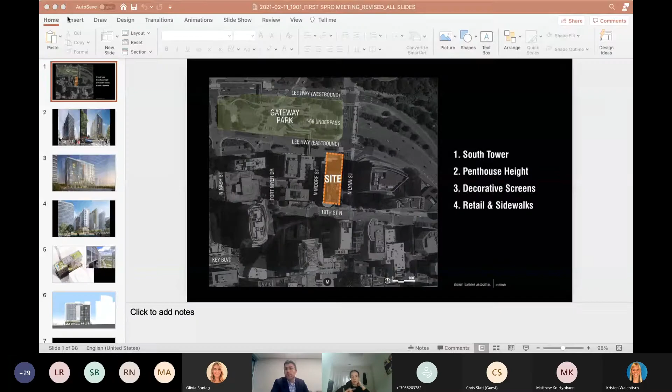I'm Shalom Baranes, working with a team on the project from my firm, Shalom Baranes Associates. I want to make a very brief presentation touching on the 4 topics you see here. Some of these have been refined somewhat since we published the 2 videos, and others I just want to add a little information to. If we could go to the next one, Jeff, please.

Thank you. On the left, you see an image of the south wing of our building that was in the 2 videos we published. We made some changes to the elevations, primarily having to do with relocations and reconfiguration of the balconies on the facade, on all 4 facades of the building. You see the revisions in the rendering on the right.

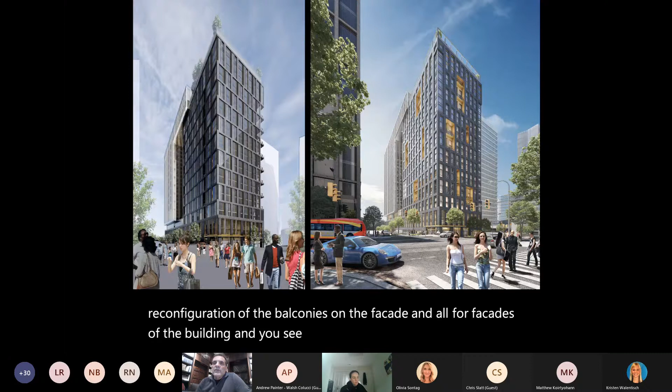Rather than stacking the balconies vertically on the corner, as you see on the left, on the right you can see we've developed them more in a collage-like fashion. One of the reasons we did this is we wanted to develop a bit more contrast between the north wing and the south wing of the building, and we felt this was one way to accomplish that.

Here's just one more view of that as you look at it from the Key Bridge side, looking south.

The next issue I wanted to address is the penthouse of the building. In the left-hand diagram, you see again the south wing, the left darker portion of the building, where the swimming pool is - no changes there. That has remained the same.

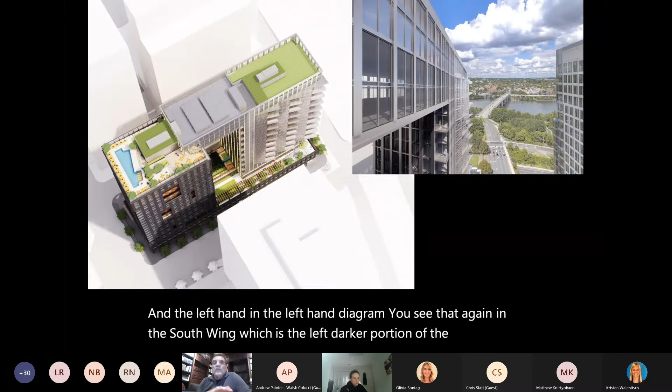But on the rest of the roof, which extends approximately 2/3 of the length of the site, we reconfigured all of our equipment, moved some of it around, and created some wells that go down into the lower space. All of that enabled us to lower the overall penthouse by 10 feet across its entire length.

So here in this image, everything you see in white at the top of the building, including the bridge that spans over the sky window, is now 10 feet lower than it was in the videos we published previously.

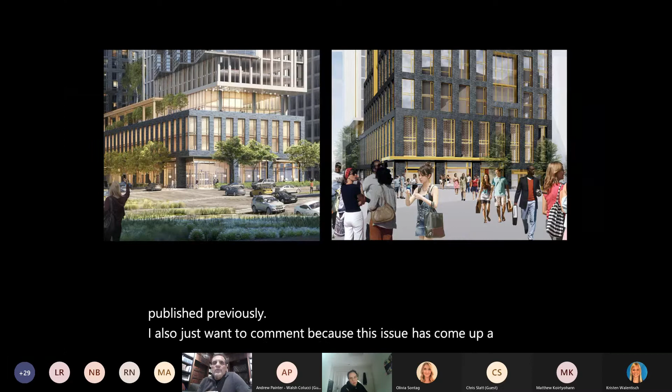I also want to make a comment because this issue has come up a lot about the 2 stories of parking we have above the retail. As you can see, we are bringing the primary facade materials all the way down here, so we're not trying to save money by going to a less expensive facade material.

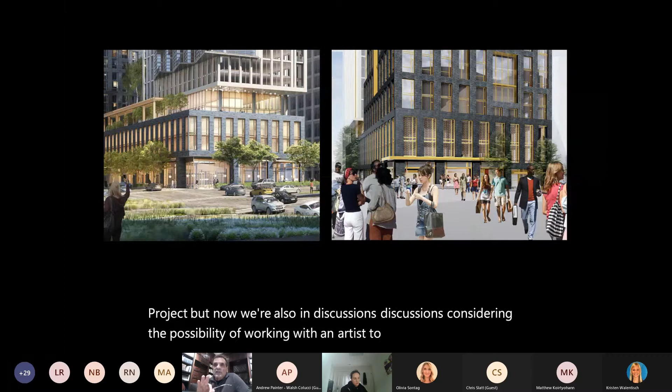In all our renderings, we've been showing these decorative metal screens, which we do intend to incorporate into the project. But now we're also in discussions considering the possibility of working with an artist to infill some of these panels, between the vertical piers, with graphics developed by an artist in collaboration with us. We're particularly focused on the elevation you see on the left, which is the elevation of the building you see as you come across Key Bridge.

The next topic I wanted to address has to do with the public realm at the ground level around the site. These existing photographs, I just wanted to show these to remind you all how narrow the streets on the east side and west side, North Lynn and North Moore Street, of our project are.

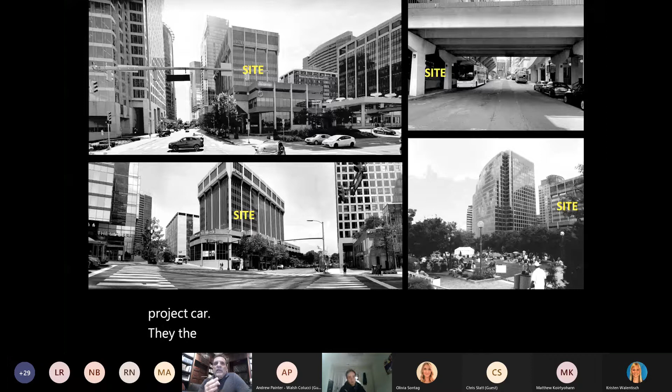The current width of the plinth of the existing building cantilevers over the sidewalk, and that existing plinth is 112 feet wide. We are going to narrow that portion of the building in our new project down to 89 feet. So it's going to go from 112 down to 89, and that will considerably improve the sunlight and daylight coming down on both North Lynn Street and North Moore Street. They'll just feel much more generous and I think be more pleasant streets to be on.

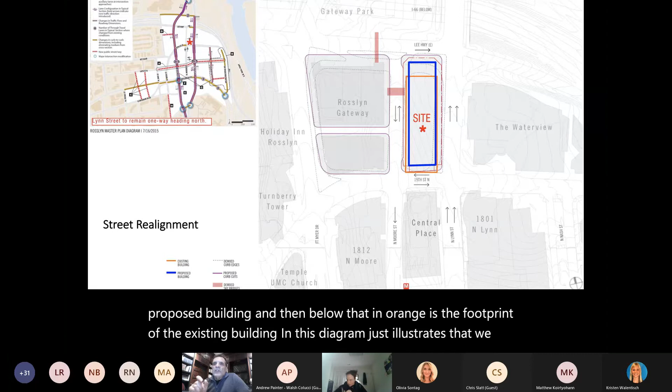So here in blue on the right, we are showing the footprint of our proposed building. Below that in orange is the footprint of the existing building. This diagram illustrates that we are making our new building narrower, leaving more room for planting, sidewalks, and amenities.

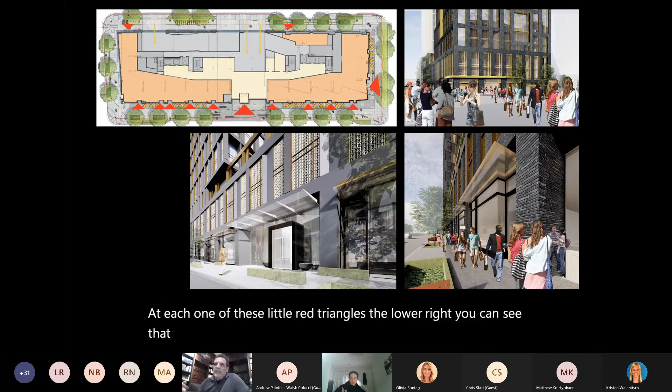The other thing we did, if you look at the rendering on the lower right, at each of these red triangles, you can see that we recessed the glass slightly. That becomes a potential location for a retail door, and it also creates a 90-degree glass corner for retailers to display their goods. All of this is being done to enliven the retail in the public realm as much as possible.

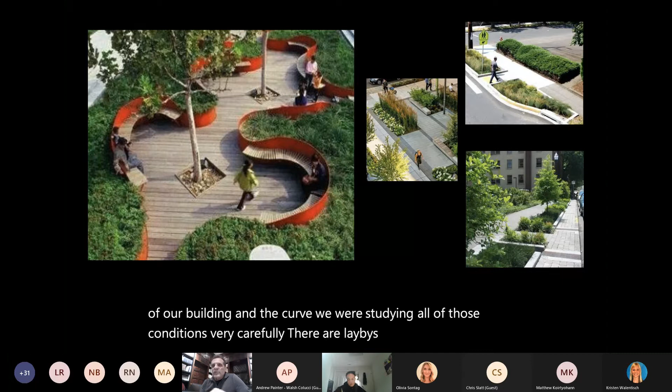Beyond the face of our building, between the face of the building and the curb, we're studying all of those conditions very carefully. There are laybys, driveways, straight curbs, and we are developing unique, specific landscape conditions, such as you see here in these precedents, to address all of those different conditions.

The larger image on the left, with the red ribbon bench, is an idea we're developing for the north side of our building, which is directly across from Gateway Park.

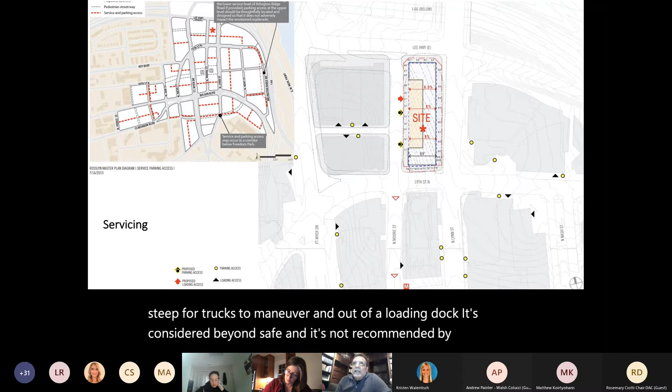So we had to consider a different scheme, which is what we're presenting here, showing service entrances along North Moore Street instead of a service alley cutting through the middle of the block. We had this exact same problem on the Monday Properties project on Wilson, which hasn't been built yet. There, the sector plan also called for an east-west service alley, and as we studied it, we found there was really no way for trucks to maneuver. We developed a similar scheme that did not cut through the center of the block. Thank you, I appreciate that there was a focus on loading access cutting through the block.

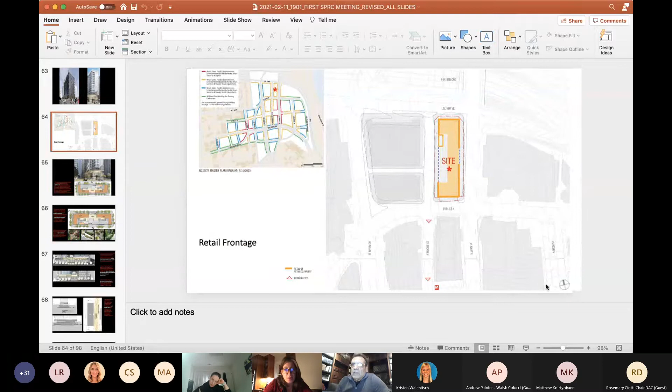I'm concerned because the block looks enormous, and if there was a way for neighborhood residents to cut through the block, not necessarily loading vehicles. How might a neighbor cut through, or do they have to go all the way around?

I'm sorry, are you referring to the ramps of the parking garage? Yes, the above ground parking. For the parking garage, for the parking. Okay, thank you.

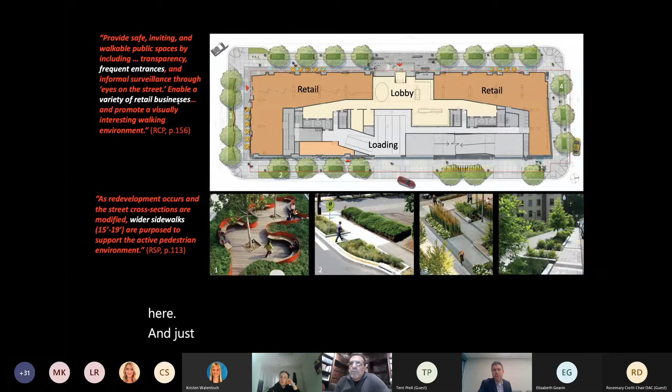Building onto that too, looking at this, because we have the two components of the building, the two wings shared by the same common lobby entrance, it would be kind of difficult to punch through that and still have a secure lobby for residents. That's a good point, Andrew. You can see the elevators - Jeff, if you could point to the two sets of elevators - there's one there, another on the right, and they're serviced by one lobby entrance, basically.

So I'm wondering if there's a creative option for getting some of that flow. I understand it might not go directly through the middle of the building, which might then become less desirable or useful for community and neighborhood residents. But is there a way for some sort of a path through part of the retail? I'm sympathetic to the fact that this makes the block a little impassable for residents in the community.

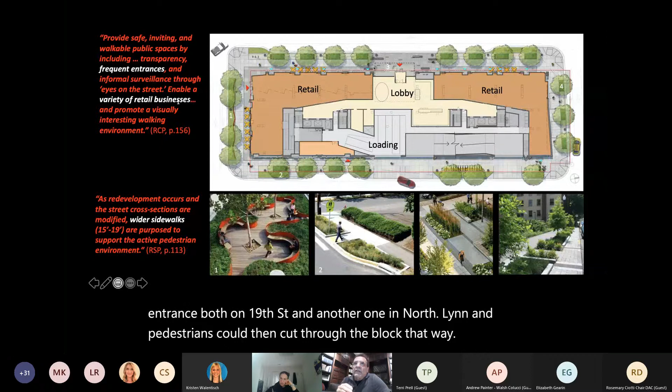Yeah, Jeff, can we go back to the ground floor plan, please? The image you just had up a minute ago. Here we go. Certainly, if the retail level were occupied either on the north end or the south end by a single retailer, it would then be possible - contrary to what some original speakers wanted, having one entrance to the retail - but if you wanted a cut through, it would be possible for a retailer to have an entrance both on 19th Street and another on North Lynn, and pedestrians could cut through the block that way, either at the north end or the south end of the building.

As I was asking the question, I realized that would go counter to some of the prior commentary regarding equal access - one entrance, exit, as we were talking about. Although from an accessibility standpoint, if there was that flow, is there a concern if you had kind of an entrance and exit? Again, understanding it would have to be one retailer with a large footprint in the space.

Both entrances on the east and west in that situation could be designed to be fully accessible. This is a very challenging block, given how narrow it is and how we have to fit trucks, loading ramps, and garage ramps into this particular dimension that we have.

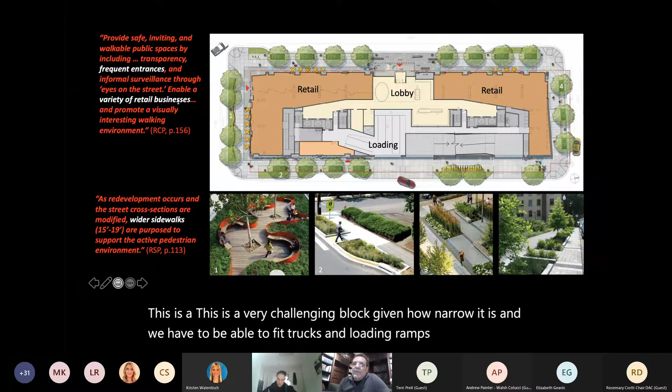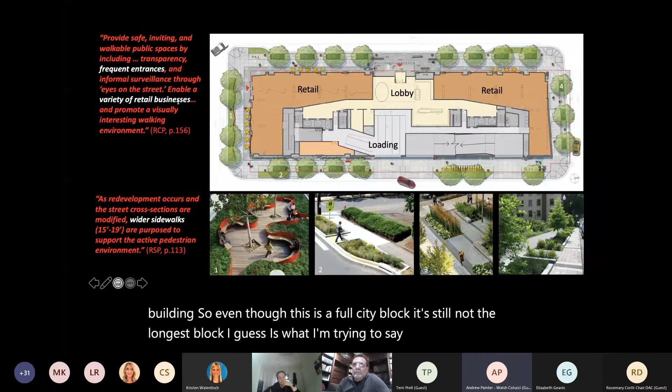I mean, you talked about the narrowness of the site. It's probably the most narrow block in all of Rosslyn, but the length of the block, when we think about a huge city block, is pretty comparable to Central Place immediately to the south, as far as the length of that entire building. So even though this is a full city block, it's still not the longest block. It's comparable to other buildings you'd find in Rosslyn, and on those blocks, like in the 18th Street corridor, there is that passageway through as well.

Commissioner Gearin, your hand is raised. Is that from before or a new comment? It is a new comment.

So this kind of gets at the next part of the agenda, but when I first asked about cutting through of the super block to make it easier for the neighbors to get through as the whole community gets built up, you'd said that it had to do with the way the above ground parking is oriented. Are we sure we need all of that above ground parking? The ratio is much higher than what's required for the site.

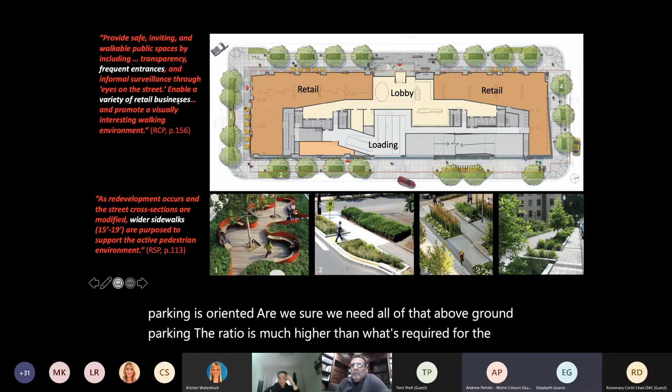Sean, do you want me to start off with the parking ratio issue? Sure, go ahead. So by way of background, I think we've got 290 spaces, and we've tried to size the garage to accommodate the anticipated market demand here.

I think the goal from Jefferson Apartment Group's perspective is to really right size that garage so that it is on one hand adequate to meet the market demand, but on the other hand, not provide extra parking that incentivizes people to drive. When we were laying things out, Matt, I don't want to put words in your mouth, so feel free to chime in.

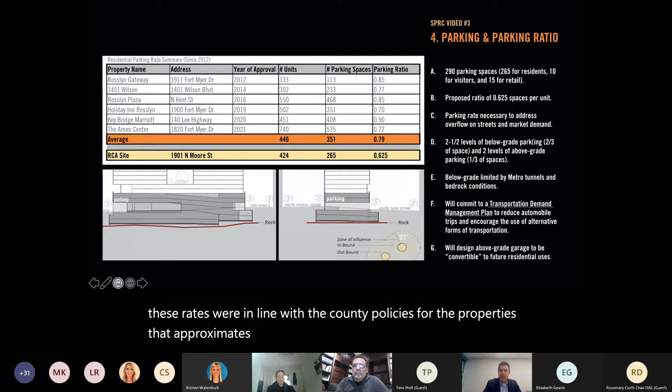But my understanding was that these rates were in line with the county policies for properties proximate to Metro Rail, and certainly in line with, if not less than, the other projects that have been approved even recently within proximity to the site. I think a lot of the other projects are at 0.70 to 0.90 spaces per unit, and we're down at a 0.625 ratio.

So I just, from a ratio perspective, wanted to mention that. And we can get into the reasons why we have the above grade parking or why we can't go deeper, if you like. But I wanted to mention that as far as the ratio goes, on one hand we're trying to thread a needle of meeting market demand, and on the other hand recognizing that we are proximate to Metro.

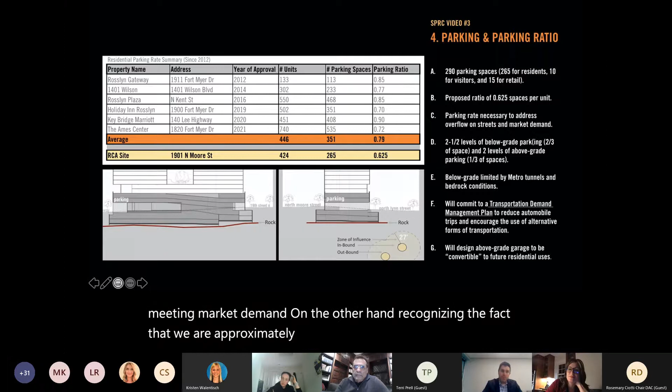Some of the other comments we received were interesting across the different community groups we met with. We met with North Rosslyn Civic Association and North Highland Civic Association, and there were differing opinions about how much parking should be provided here, concerns about overflow parking on adjacent streets and things like that. Then another group was interested in reducing parking wherever possible. So we've tried to strike the balance. Relative to the other projects that have been approved recently, I think ours is among the lowest, if not the lowest.

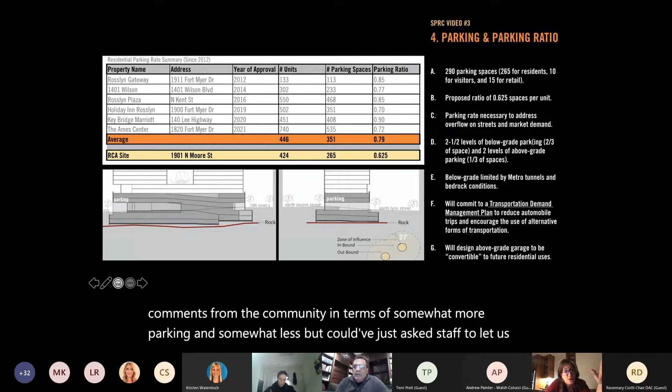Thanks, Mr. Painter, that is helpful, and we have run into that before with developments in Rosslyn. We get mixed comments from the community in terms of somewhat more parking and somewhat less. But could I just ask staff to let us know? Sarah, since we've started to talk about the parking, I thought the ratio seemed high, but perhaps I could get a definitive interpretation from staff on that. Let's hold off on that for one second.

I did want to move off of site design and into architecture. If no other comments from committee members on that topic, I will take chair's prerogative and say, with regards to the architecture of the building, I personally really like it. I'm excited with where this is going, and I think it adds something to the aesthetic of the space. So I wanted to give that as a positive comment, that I've enjoyed seeing the evolution of that building, and I'm excited for that aspect.

If no other comments on site design and architecture, I think we are smoothly moving into transportation, and why don't we pick up with parking ratio, which is where we had been a moment ago. Staff, do you want to respond to Commissioner Gearin? Well, I was just going to add on to the previous comments there on the parking ratio.

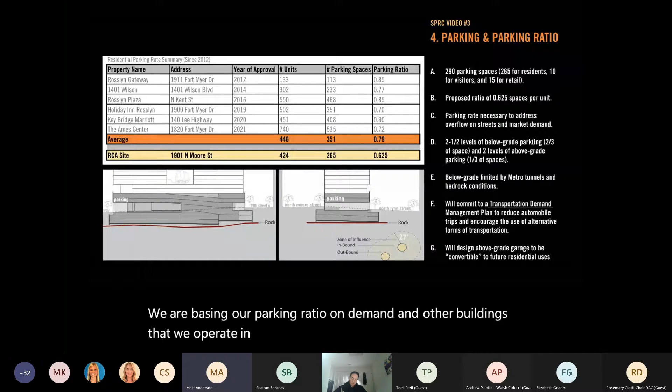We're basing our parking ratio on demand and other buildings we operate in Arlington, so the ratio we're designing for this building right now is what we feel comfortable with to meet market demand. It's worth noting that for the above grade parking, our floor plates are flat, other than the speed ramps leading up to them, so there is potential to convert those to another use in the future if parking demand decreases as transportation trends continue. We are designing to demand, and that may not necessarily be the same as parking ratio guidance.

Staff, did you want to respond on the parking ratio, and then we have a couple other hands raised from committee members.

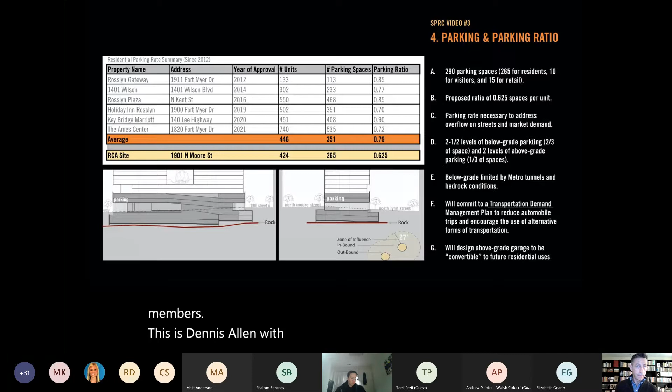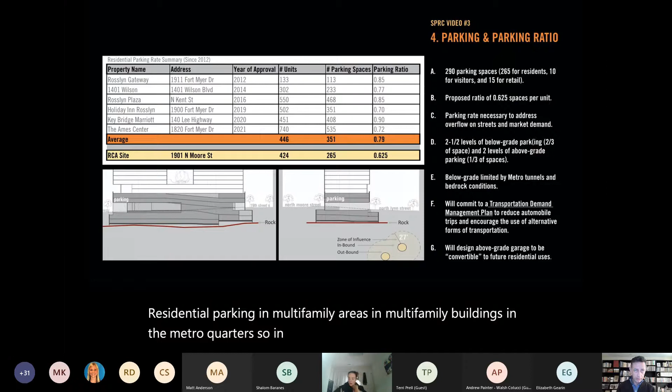This is Dennis Sellen with DES. My comment on the parking is that, as many of you are aware, in 2017 the county board issued guidance that relaxes the ability of developers to provide residential parking in multifamily areas and buildings in the metro corridors. So in this area of Rosslyn, a developer could provide somewhere around 0.2 or 0.3 spaces per unit. This developer is providing approximately 0.625, which is somewhat conservative. I think they showed a matrix illustrating they are around the middle of the road for developments in Rosslyn. So essentially, they are within the requirements and within the guidelines. They could go lower and they could go higher.

We would certainly accept a lower ratio, and we have been accepting lower ratios. I think the lowest I have seen, in a current site plan up in Courthouse, is 0.38.

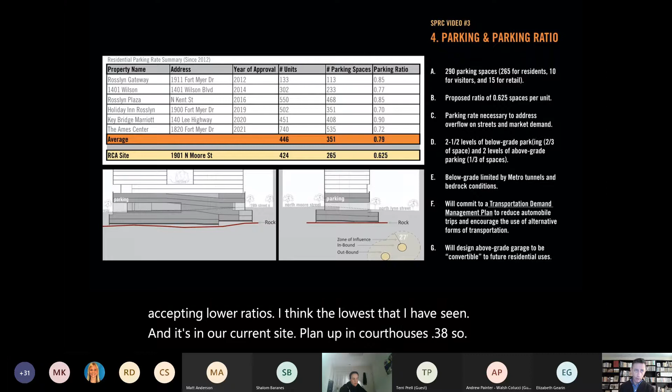It's definitely a question of what market they're trying to appeal to, given the proximity to Metro, the high amount of goods and services, the walkability of the neighborhood, the walkability to Georgetown, et cetera. Are you trying to appeal to a walkable neighborhood, or to folks that do have a vehicle? It's entirely up to the developer, however they are within the guidance as it currently exists.

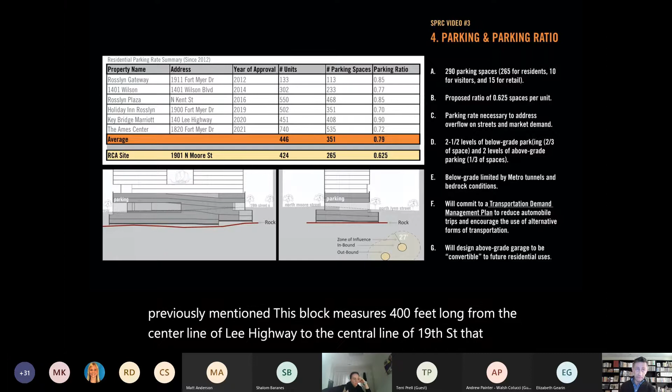I also want to point out one thing on something previously mentioned. This block measures 400 feet long from the center line of Lee Highway to the center line of 19th Street. That is not an excessive length for urban streets, particularly for Rosslyn.

I appreciate that comparison point, though that may not change the community's feelings on what feels like a longer stretch of block when you've got large buildings covering a greater area. So I appreciate that 400 feet is not some sort of super block, but it may not feel that way at the ground level walking. Sorry, I just wanted to make that point.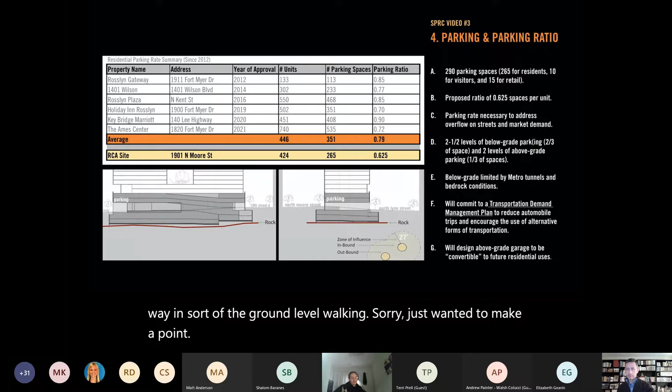I just wanted to clarify with regards to the parking ratios you mentioned. I understand this is in the middle of what we're seeing in Rosslyn ratio-wise, but that does include developments built a much longer time ago, right? It does, and it also includes some approved within the past year, so they have developments of varying timeframes. Okay.

So we do have some other hands raised from committee members. Commissioner Siegel.

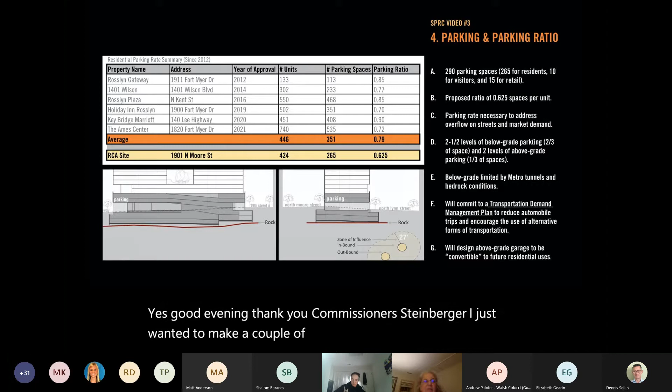Yes, good evening, thank you Commissioner Steinberger. I just wanted to make a couple of comments. I'm happy about your chart. We had seen charts and averages that included parking in Crystal City, which I never thought was an appropriate comparable. I'm happy to see you're at 0.625, because the last building we approved in Rosslyn was, as you point out, Ames Center at 0.72. I'm also happy to see that the above grade parking was designed so it could be reused in some way for another use.

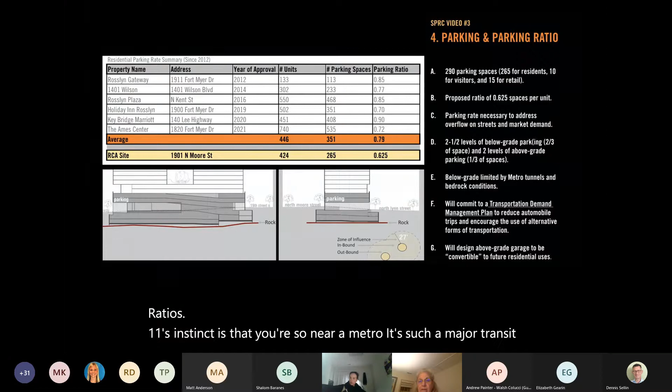It's very interesting to look at this collection of ratios. One's instinct is that you're so near a Metro, such a major transit point, that why would we need that much parking, with respect to the residential parking study which I think Mr. Sellin was referring to in terms of the range of what's possible. But to me, it looks like some progress.

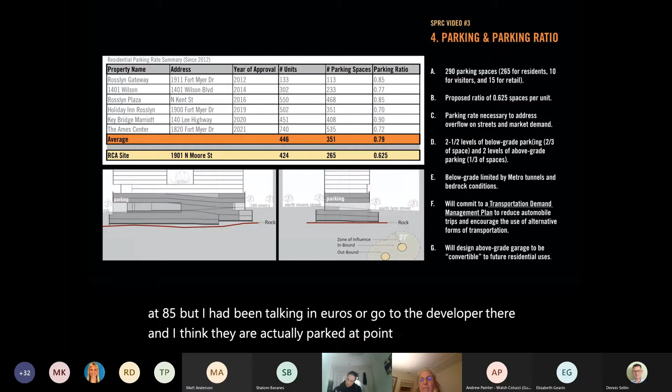I did just want to point out that I guess you don't have Central Place up here, but I do know they were approved at 0.85. I had been talking a year or so ago to the developer there, and I think they're actually parked at 0.75, and there is some sharing because it's an office building and residential, so there can be that reuse.

I recognize I'm on the side of pushing these ratios down, but I do think it's tricky.

Commissioner Steinberger, I had a question about the art panels. Let me just ask the question so I know where we can discuss it: would that qualify as the art on site? Ms. Walentish, can you talk about that, or is that a community benefit? If it is, we can talk about it when we get there. I had intended for that to be covered in community benefits. Okay, it's on my cheat sheet agenda, and happy to answer when we get there.

One more exhibit I think would be helpful with respect to the permeability of the site for pedestrian access. Could we get an exhibit that shows this building in context of the current street network, maybe 500 feet around, so that those of us who don't live in Washington, Rosslyn, and don't have those desire lines mapped out could see what the pedestrian routes are and what they feel like? Could we possibly get that from the developer? I think we do have a drawing that shows that. Jeff, can you pull up one of the site plans that shows the larger context?

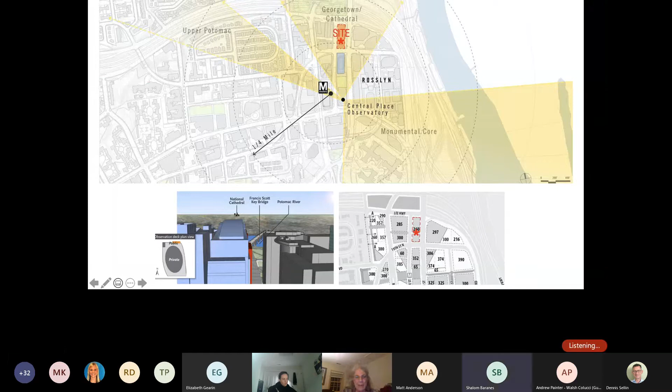Here we go. This is a lot more than 500 feet. We could possibly enlarge this for you. Right, I was thinking sort of enlarge the smaller, a quarter mile, maybe enlarge that. I guess you could do that on the spot, couldn't you? There it is, the quarter mile. Okay, presto.

I would just recommend that commissioners who might not be as familiar with the desire lines there and the walking patterns take some time to study that a little bit. Maybe it would put to rest some issues about permeability. Maybe not, I don't know. It's just a suggestion. So thanks so much.

I might go a step further and say I appreciate that you pulled this up on the spot based on the comments and feedback we're hearing live. Maybe for next time we could see a view with some air, because it's a little hard for me to tell with all the same color palette what some of those walking paths are. I'm looking at this on a smaller screen with the agenda and other stuff going on, so perhaps for next time something geared towards that site walkability for the neighborhood would be appreciated.

Okay, certainly we'll do that. Thank you. I'm going to call on Ms. Prell and then Mr. Slatt.

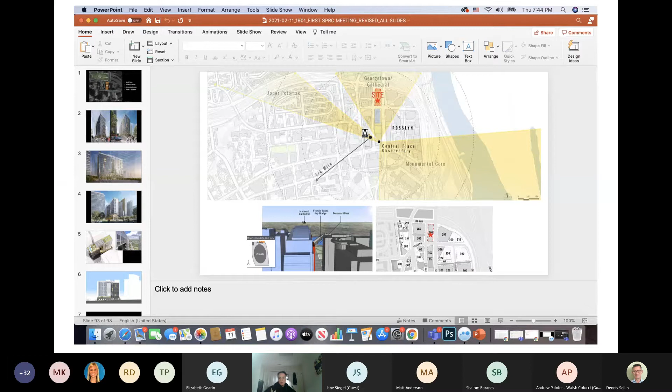Hello, I have several comments. First, going on with Jane's comment about the art, this building is very near Cliff Garten's Corridor of Light, which is supposed to be an important part of the entrance into Arlington. I think it might be interesting if they could find some way to make the parking area screening reflect that, or amplify on that. It would be a way of continuing the corridor of light, which was the original plan for it.

I really wanted to talk about two other things. One, I find the new building changes look dark and gloomy and fairly oppressive to me. I don't know if you're planning on using that deep of a gray, but it was kind of spooky looking, I thought. I did not see that as an improvement.

The third is, I am from the North Rosslyn Civic Association, so our view on parking is very different than other areas. People in this area do need cars. Some of us are elderly and not nimble. We are not going to scooter or bicycle. I am not going to carry my groceries back on my back. I use a car for grocery shopping, for Costco, for doctors. If someone wants to come to my house for dinner and they're coming from Montgomery County, they are not going to be using Metro. I think you have to understand this is a residential community and not just a business community. That's it.

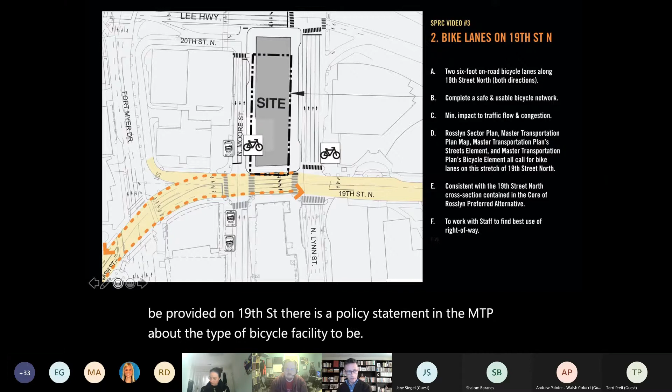There is a policy statement in the MTP about the type of bicycle facility to be provided. However, the specific statement in the MTP for bike lanes on 19th Street is to provide a bike lane. And when a protected bike lane is called out for specific projects, it is called out. So for 19th Street, it was not called out for a protected bike lane.

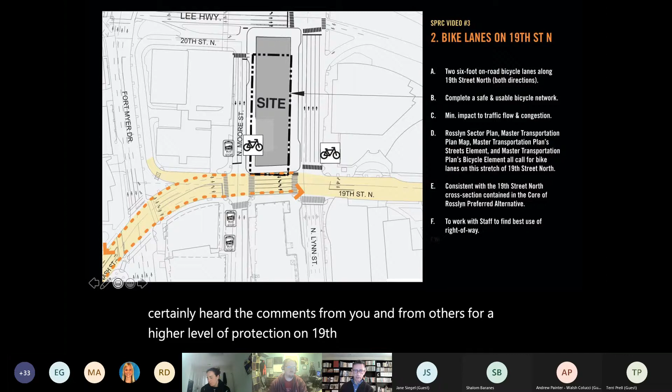Now, I don't want to quibble with you. When we can find space for a higher level of protection, we are going to do it. We have certainly heard the comments from you and from others for a higher level of protection on 19th Street. We and the applicant are working to see what we can provide in addition to what is being provided in the current iteration of this proposal for 19th Street that would give that higher level of protection being sought. I cannot promise you that we're going to get to the place that you want us to be with this project, and it would only be for this block between North Lynn and North Moore Street.

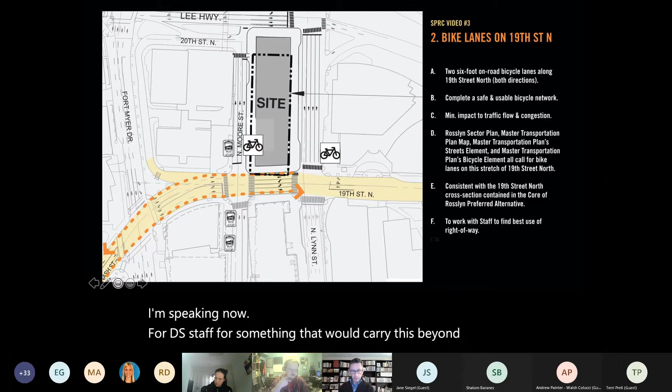We are looking, speaking now for DES staff, for something that would carry this beyond this block, because whatever we do provide, DES would probably need to carry this in the east and west direction, given that this would need to be part of a larger network. So we're having that conversation internally, both as part of this project and as part of a larger question: can DES carry this through? And I know you're specifically interested in the connection to the Mount Vernon Trail in the eastbound direction. So we're looking at what could be provided that's better than what's there today, and we've heard you. Thank you, I appreciate that.

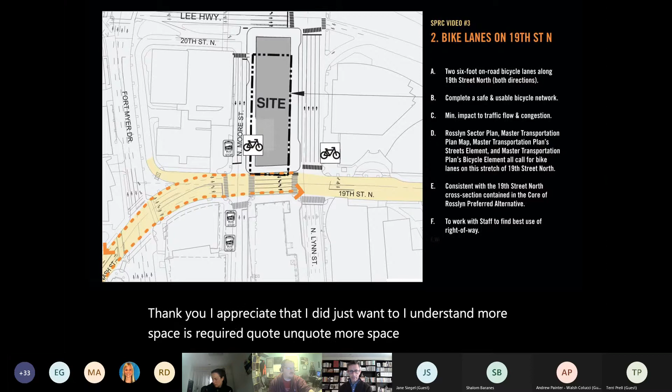I understand more space is required, and that's consistent with the Core of Rosslyn final report. The early plans for Core of Rosslyn called for protected bike lanes on 19th Street, but that got pulled back over the course of the process because reallocating space was causing traffic backups for cars. The report said 19th Street protected bike lanes were found not to be feasible, quote, until additional space can be integrated into the street cross section through redevelopment. I want to point out, I think this is our only shot at integrating additional space into the street cross section through redevelopment, given how new the new building is across the street.

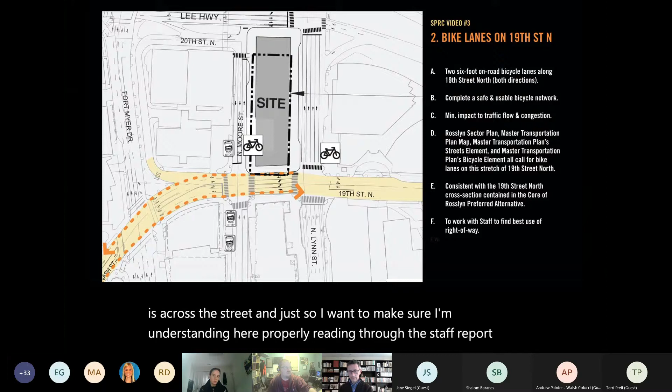I just want to make sure I'm understanding properly, reading through the staff report. Am I correct that something like 23,000 square feet of current county right-of-way is supposed to be vacated as part of what's currently planned here, to become part of the applicant's site?

So the county right-of-way being vacated, Chris, are those internal roadways not on 19th Street? The internal roadways are on Lynn Street, adjacent to Lynn Street and adjacent to Lee Highway. So 19th Street is -- well, okay, there are proposed vacations right there, so there is county right-of-way. Thank you for sharing that. But by and large, the vast majority of county right-of-way being vacated is adjacent to Lynn Street and Lee Highway. So frankly, we would probably be looking at taking additional sidewalk from 19th Street in order to provide something greater than what we have.

I just find it disappointing when the county is giving up 23,000 square feet of its space for this development, that the developer can't find some of that space to give back on 19th, moving things around.

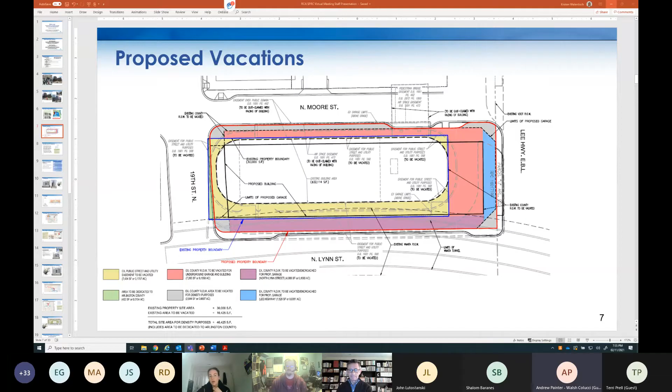Thank you. I would like to reiterate that for the next meeting, to the extent any progress has been made on this topic, that's something we'd like to hear more on, with regard to the bike lane, as we saw in the public comments, it was a very popular topic. So if there are no other comments, I'm not seeing any on this particular topic, I'd like to move to open space.

Oh, is there one hand raised? Mr. Rapetsky, and can you say what organization you're representing?

I have my hand raised, but my name is Timothy Effio. Oh, I'm sorry, I'm looking at someone. I'm so sorry, apologies on that. I was reading the wrong part of the screen. That's what I get for trying to do two things at once.

Mr. Effio, and which group are you with? Apologies, the Climate Change, Energy and Environment Commission. I'm the vice chair for that commission. Oh, wonderful, and yes, please.

Is it appropriate to talk about electric vehicle installations in the transportation section of the meeting? I think it would be. Can we get some comment on the plans for that, please, from the applicants?

Yeah sure, this is Andrew Painter again, and I think I'd defer to our representative, Mike Babcock there from Sustainable Building Partners. But we are programming or including both EV ready facilities and EV chargers within the building. So Mike, I don't know if you want to elaborate on that at all.

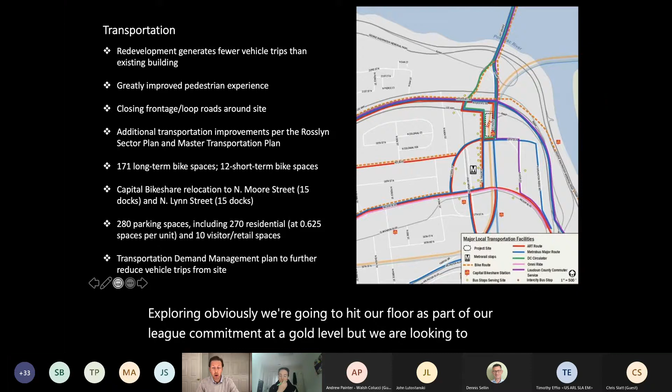So one of the things we're exploring, obviously, we're going to hit our floor as part of our LEED commitment at a gold level. But we are looking to potentially install more than that floor day one, actually, from a percentage perspective, as well as increased ability infrastructure to expand that to a specific percentage.

And while this project is subject to the existing community energy plan, we have looked at it from the current perspective of the new plan coming in, and we're looking to potentially include electrical vehicles that are consistent with that new standard in terms of day one charging stations, as well as future ability to expand once that demand increases. So while we're still working that out, we are looking at more than that floor percentage that you would need for, say, a LEED gold building.

Okay, but no numbers at the moment. Yeah, I mean, Matt can jump in, but in terms of our percentages, we are looking at potentially going to 4% with an expansion to potentially 15%. And I think it's just a function of, we're still working that out, but that is above and beyond the minimum requirements.

Matt? Yep, thanks Mike. Yes, as Mike mentioned, we are looking at doing 4% day one with the ability to expand to 15% at some point in the future to make sure that we are meeting that EV demand.

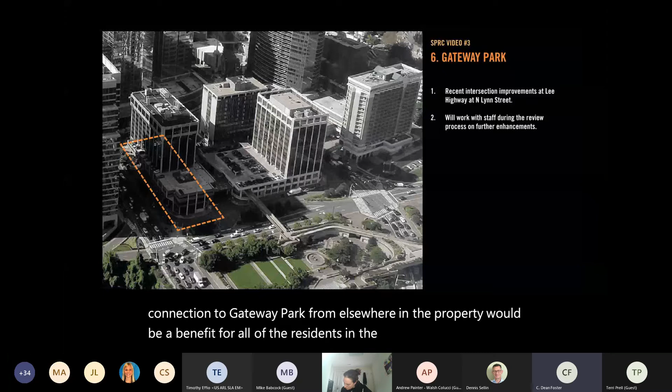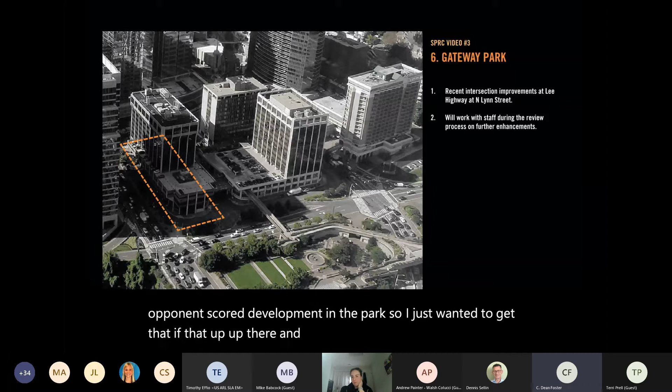That's it. Thank you very much, Mr. Foster. I would like to emphasize that we did see several comments in the public engagement session that addressed that specific point. Looking not just for better connections to the park, but also what could be done to improve the park. Were there any plans for that? Was that going to fall under a community benefit? I think that's certainly something that Parks and Rec is not alone in wanting more information and to emphasize that point. I will now allow the applicant to respond.

Yeah, and I might turn it over to Shalom Baranes as well.

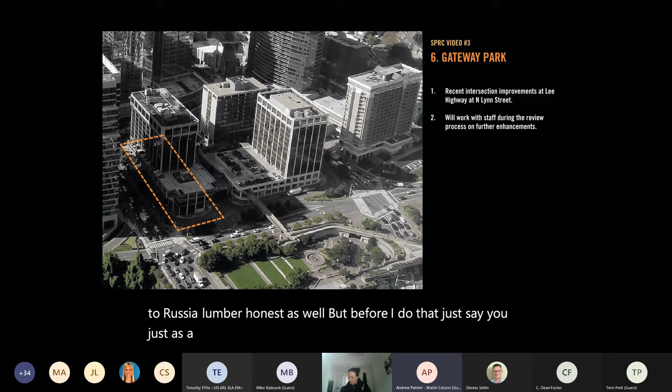But before I do that, I'd say as a fundamental imperative to this project, our entire design team understands the importance of Gateway Park, both to the future residents of this building and to Rosslyn generally. This building helps frame that park, and the sector plan calls for buildings to create a sensitive gateway edge in terms of how it relates to the park and its connectivity.

Mr. Foster, you're absolutely correct. In our response, we talked about pedestrian connectivity and how it was recently enhanced through improvements at Lee Highway and North Lynn Street. Our building has tried architecturally to adopt the language of Gateway Park, to activate it with people and uses and eyes on the street.

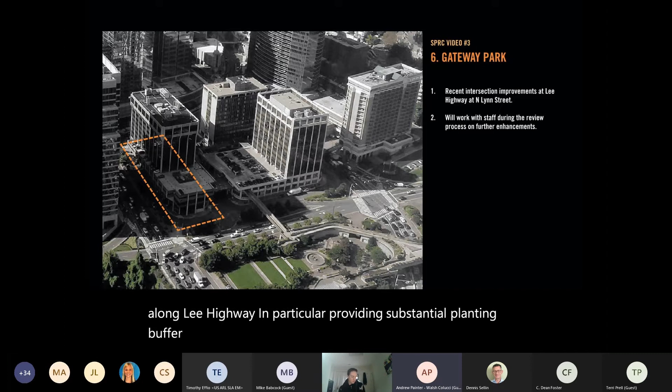One of our other responses you may have seen is what we're specifically doing along Lee Highway, in particular providing a substantial planting buffer to serve as a vegetative barrier with plants, but also to help frame Lee Highway and convert the typology of that road from just a pass-through street into more of an urban boulevard, which is shown here.

As part of our community benefits discussion, we are internally talking about a potential open space contribution similar in style to what the Holiday Inn site did. The numbers will vary, but that's all part of the community benefits package that's on our radar. We just haven't been able to get there just yet.

But Shalom, did you want to talk to the edge, at least on our side of Lee Highway, and how we're relating to the park? Sure, thanks Andrew. I think you've mentioned the main points.

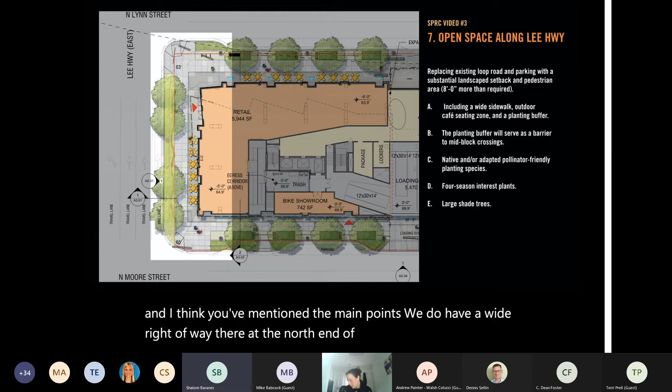We do have a wide right-of-way at the north end of our building, and we have an enhanced wide green strip from the curb to the edge of the sidewalk. That's the area where we're incorporating trees, low plantings, as well as these built-in benches.

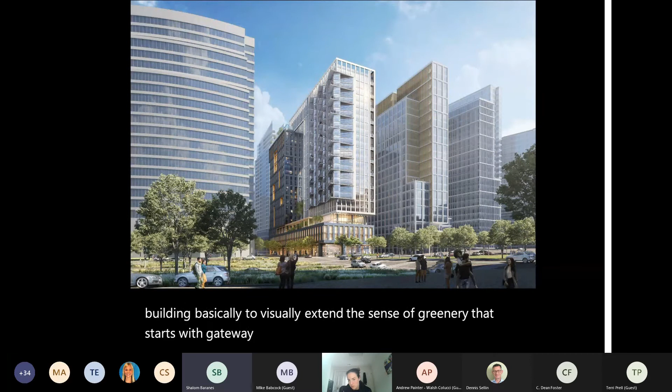The other point I wanted to mention, which you started to touch on, Andrew, is that we've developed the overall aesthetic of the lower portion of our building basically to visually extend the sense of greenery that starts with Gateway Park. As you come across the bridge there, you see the park, and our thought was to keep your eye moving north, both along both streets.

We have elements of green, both above the parking, at the curb level, across from the retail, and also as you step up the building inside the sky window that we have there. So we did visualize all of that as being in spirit, aesthetically and visually, an extension of Gateway Park.

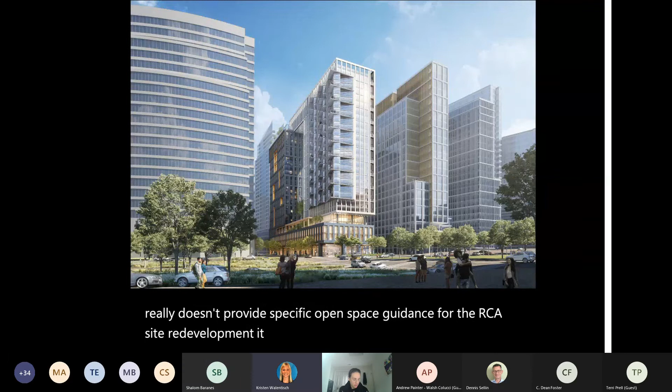This is Kristen, I'll chime in on the county's behalf here. I echo what Andrew and Shalom said about the efforts they're making with that sensitive edge transition and providing that landscape buffer on Lee Highway. Also, the sector plan doesn't provide specific open space guidance for the RCA site redevelopment. It is right there adjacent to Gateway Park, and also a proposed esplanade that is supposed to be going through the site across the street on the Gateway Park side in the future. So we want to be very cognizant of that, and I think that landscape buffer does help recognize that, and they are very aware of that.

So apart from what the sector plan suggests for open space, I think we would rely heavily in this case on the community benefits package and looking at ways to either provide contributions toward the improvements of Gateway Park or connections as we discussed. So as we continue to look into the community benefits, we can expect more information and details to come out on exactly where the money would be going. So stay tuned.

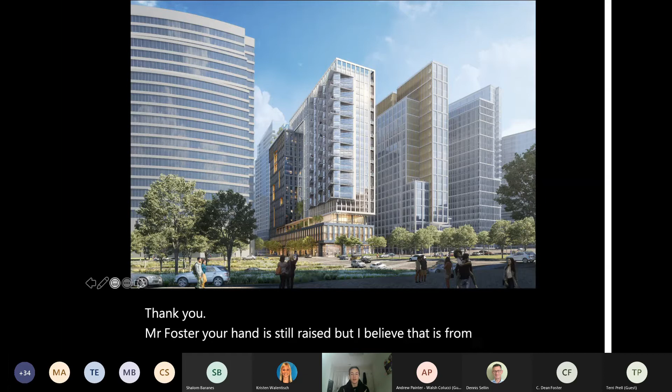Mr. Foster, your hand is still raised, but I believe that is from your original comment. If you have further comments, let me know, or please lower your hand.

Okay, thank you. With regards to open space, any other comments? We talked about Gateway Park significantly, other on-site amenities I guess as that relates to open space in terms of biophilic elements—if there's commentary on that, or maybe the applicant could speak to that a little bit to orient folks to any biophilic attributes.

Yeah, and I think this is Andrew again.

I'll defer again to Shalom or Mike, but just to let everyone know, the way the site has been designed, especially with the sky window through, the whole concept is to let light and air into the interior of the building, so it's not just a solid wall, which is a pretty unique architectural feature. Interior to the building, obviously there will be amenity spaces for residents, rooftop terraces and uses for those residents as well. So Mike or Shalom, did you want to talk about amenities and biophilic elements?

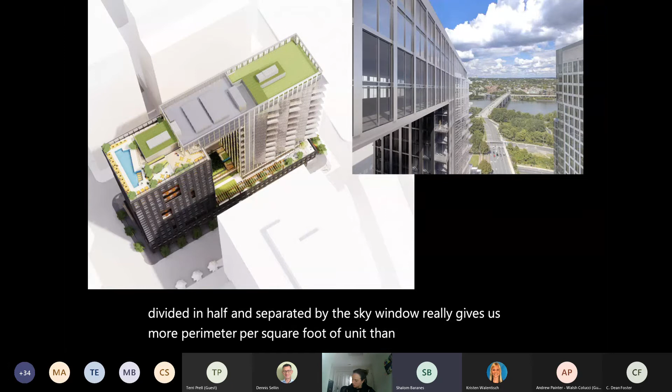I would re-emphasize the point you just made, Andrew, that one of the most important aspects of biophilic design that we don't focus on enough is natural light into the units and into interior spaces. This footprint we've developed, divided in half and separated by the sky window, really gives us more perimeter per square foot of unit than in any other multifamily residential building we've done. So many of these units have views out to green space, up as high as the 7th floor. They can walk out of their units into an area that has a grove of trees, which I think is very unusual for this type of development.

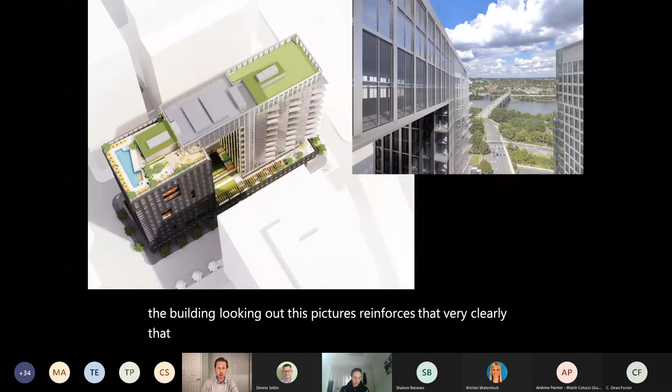I would echo that when you talk about biophilic design, the core concept is the effect it has on the mind, body, and spirit — the fractals, right? When you see sun coming through trees onto the ground, that makes a difference. When you're in the building looking out, it reinforces that connection to nature because of those unobstructed views. So having a lot of light, controlled for glare, and angling the building to maximize exposure to the natural elements.

Not to mention the building height being a little lower and having a significant green roof position for this project, the surrounding buildings will be able to see some of that green space at the higher levels too, in an urban context. In a dense urban context like Rosslyn, any green is a significant improvement. So I think the green roof position, just like Shalom mentioned regarding looking out in that picture, says it all.

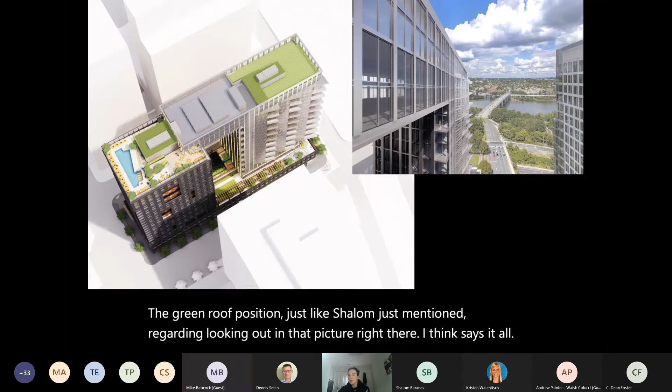Thank you. Mr. Effio, I called you by the correct name this time, so — yeah. Thank you.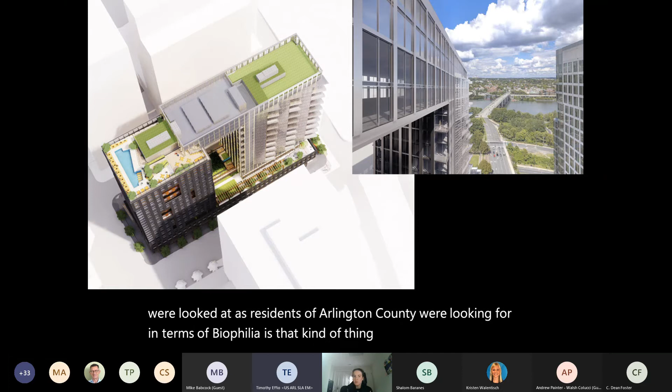I wanted to say I'm very pleased to see elements of biophilia in the design. Certainly light is important, and we really focus on green space. It seems like you've done that on the 7th floor roof as well. Do you plan on putting trees on the roof? That's my first question. My second comment is that the design that came out last week for the Amazon Helix really does a great job of incorporating green into the building, and I'd say that's the bar that we, as residents of Arlington County, are looking for in terms of biophilia. So, are you thinking about ways of expanding the green spaces in the building?

As far as placing trees on the roof of the building, they would have to be planted in planters, and you can only grow a plant so high in that context. But we are planning on having some planters up there with a combination of low plantings as well as somewhat taller ones. We haven't designed to that level of detail yet, but we are planning on having taller plantings, trees, at the 7th floor level at the bottom of the sky window. We have a fairly large area there, about 60 feet wide in one direction and about 80 feet wide in the other, that will have a grove of light birch-like trees at that level.

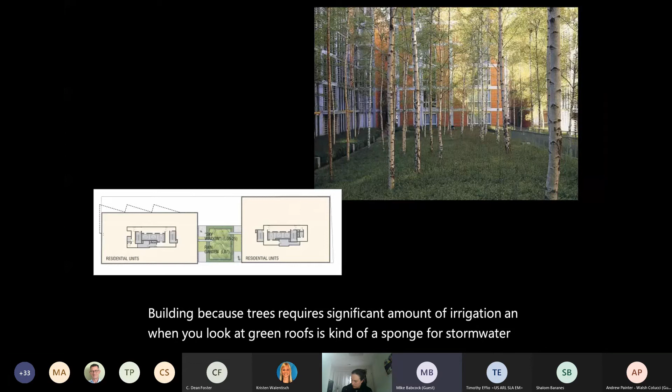I'd also say we want to be careful when using other projects as precedent. When you look at the Helix, it has that angle so it can capture rain as it goes around the building, because trees require significant irrigation. Green roofs act like a sponge for stormwater management. If we were to do something like that on the top roof, in lieu of managing stormwater, we'd be introducing a lot of irrigation requirements. And since the footprint of the building is relatively small, we only have a limited area to collect water for irrigation.

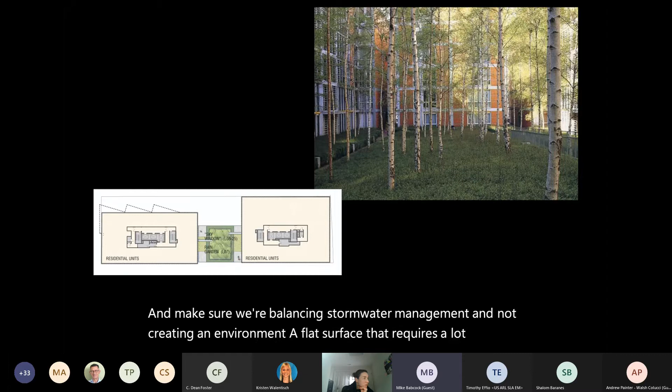To Shalom's point, I think the key is having that diversity where you can sprinkle in trees like this, where you get that dappled light effect, which is what biophilia at its core represents. But as you look on high roofs, you get into maintenance issues, additional irrigation requirements, the thickness of the roof and the structure, wind shear loads, and we want to make sure we're operating within the massing that we have on the building, balancing stormwater management and not creating a flat surface that requires extra irrigation to maintain vitality.

Point well taken. But at least in our commission, we definitely see what's possible when we see new projects, so we will continue to reference projects. Unfortunately that's the reality. I didn't mean it that way—I was just saying every project is unique in terms of how it's designed, and the massing and architecture behind what is potentially possible becomes a primary feature one way or another. So I hear you, and we all want to continue to push the envelope for what is possible.

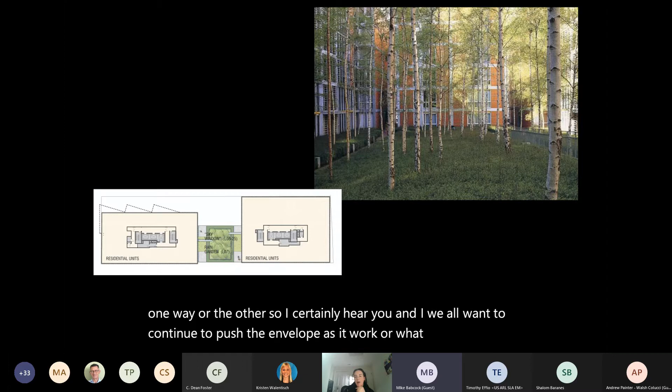Quick question just to confirm: on the 7th floor at the bottom of the sky window, those trees will not be in planters as envisioned, correct? They will not be in planters, but they are on structure. On structure, okay. Thank you.

Were there any other comments on open space? I would like to move to construction implementation then.

If there's no comments on that, would the applicant be able to speak very briefly if there are any construction considerations we should be aware of that are outside the norm or anything non-standard?

I guess I'll defer to Matt. The two things we may want to talk about are the method of demolition and the timing of construction.

As far as demolition goes, unlike the Holiday Inn site, we are going to be dismantling our building mechanically. We are right above the WMATA tunnel zone of influence that runs right under the east side of our building, and they frown upon explosions over their tunnel. So it'll take about three months to take the building down mechanically.

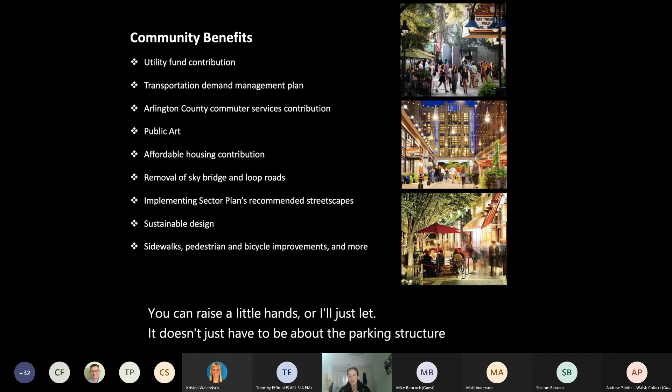So, are there any other comments from SPRC members? You can raise your hands - it doesn't just have to be about the parking structure. We're covering everything: sustainability, affordable housing, anything else.

I'm going to call on Rosemary because I know you had wanted to raise a comment on this topic earlier. Thank you. Yes, with the Type A units, those are fully accessible units, and the base is 2% of all units. I don't remember hearing how many units are expected to be built on this site.

Ms. Ciotti, there are 424 proposed units on the site. So 2% is the prerequisite mandate for fully Type A units. And because it's close to Metro, we are asking developers across the county when they come through to up that percentage voluntarily. We'd like to see 4% on site for Type A units, and that all of the affordable on-site units also be type A, fully accessible.

I think we can take that comment back. I don't think we have an answer to that this evening. Building on your question about affordable housing from earlier, at this time we haven't really gotten that far in the process with our negotiations with staff. Many projects provide a cash contribution towards AHIF because housing is so expensive and the county feels like it can utilize those funds better. But we see what's happened in other recent projects, and we are having further discussions with CPHD and housing staff as part of our community benefits package.

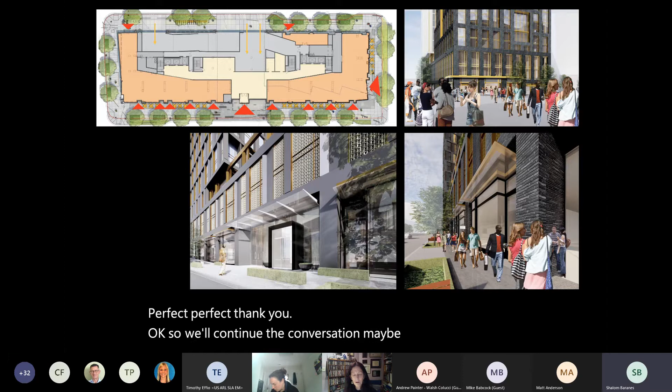Perfect, thank you. Okay, so we'll continue the conversation maybe with Sarah or with staff to talk more about the percentage of Type A units, and if there are going to be any on-site affordable units, what we can do about accessibility there. Hi Rosemary, I will definitely take your comments from tonight's meeting to our housing staff, and as Andrew said, we will continue to work on that. We'll have much more information for you at the next SPRC meeting on March 4th. I'm very appreciative, thank you all. Thank you.

Great, thank you very much. Commissioner Steinberger, I just wanted to say, yes.

Jeff, I don't know if you can share that slide again with the community benefits. This is from our presentation, but just to let you all know, we have a series of community benefits - soft community benefits, such as implementation of the Rosslyn Sector Plan, and harder community benefits like direct contributions to the utility fund and transportation demand management plan and commuter services contribution. There is a base public art contribution amount as well. And building onto what Commissioner Steinberger was talking about with the screens, that could also be part of our community benefit package.

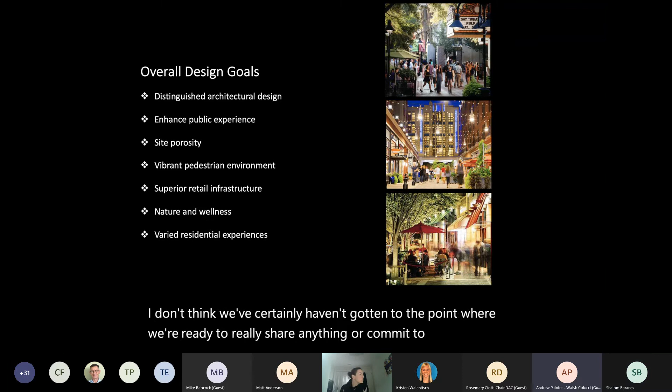So Shalom, I don't know if you want to talk about some thoughts we've had recently. We certainly haven't gotten to the point where we're ready to really share anything or commit to anything, but we've got some ideas we're toying around with, and other comments received tonight that we'll have to consider. Okay, no, I don't have anything further to add to that, Andrew.

Okay, so I'd like to make some comments on the county's behalf relating to that. Planning staff has been working with our public arts staff on this topic of screening the garage. Public arts staff is in full support of this. And regarding Mrs. Prell's comment earlier about whether that would be a community benefit or not, it likely would be, but they would receive density for it in this instance.

But I think both staff is supportive of that, and it sounds like the applicant is also interested in looking into that. So I think that would be a good opportunity here.

Ms. Prell also had a comment about the corridor of light, so I wanted to address that while we're talking about public art. That was also brought up by public art staff. Phase 2 of the corridor of light project is actually very close to this site, but unfortunately it's already constructed, so the timing wasn't quite right to get that project's closest proximity in with this development's site plan. So I think our county's choice would be to have a contribution from the applicant within the community benefits package go toward phase 3 of the corridor of light project, which is along the Meade Street Bridge. That's likely what we're looking at. Again, none of this is worked out in full and is subject to change, but that's what we're thinking right now for public art.

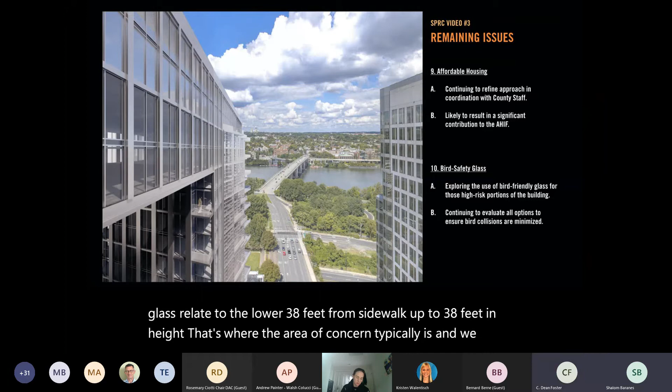Thank you. Does the applicant want to respond further than what was in your presentation? Yeah, I can say something about that. The guidelines for bird-friendly glass relate to the lower 38 feet from the sidewalk up, that's where the area of concern typically is. In the upper roughly 24 feet of that 38 feet, we have 2 levels of parking where we will have decorative screens rather than glass, so our design actually addresses that. Below that, we have retail, and we'll be very careful to accommodate the needs of the retailers along with this concern for bird safety.

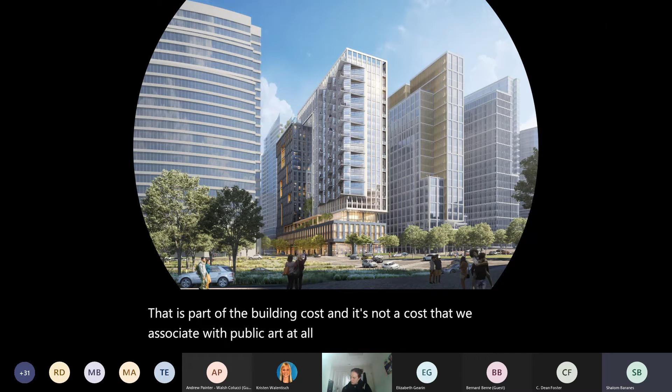I can make an effort to clarify. We are proposing using decorative metal screens along both levels of the parking on all 4 sides of the building. That is part of the building cost, and it's not a cost that we associate with public art at all. To the extent that in addition to that we work with an artist to provide some treatment, such as decorative lighting, perhaps an art light sculpture, or graphics, that is something we would consider as public art. Got it, thank you.

Very important question. Excuse me, Commissioner Gearin. Thank you, and I also wanted to go back to the bird-friendly glass.

Kristen, correct me if I'm wrong, but that would not actually be considered a community benefit—that's under sustainability. They could receive density for it, depending on how we work out the sustainability package. They're proposing LEED Gold, so if they use the green building bonus incentive policy for site plan projects, bird-friendly glass is a priority credit they can receive credit for, so they can get density for it. But that's different than it being a community benefit.

They would receive credit for it as part of the community benefits package. So in exchange for them doing it, we would be giving them that additional density they need to earn. So technically it would be.

Ms. Prell? Sorry, once again back to the screening—my point was we have a very large piece of public art, the Corridor of Light piece, which is just adjacent to this building, and it would be nice if the screening was able to play off of that in a synergistic way. My favorite piece of public art in Arlington is a screen cover for a garage, literally a block away at 19th and North Lynn Street, the Ned Kahn piece. Screening can be beautiful, we agree.

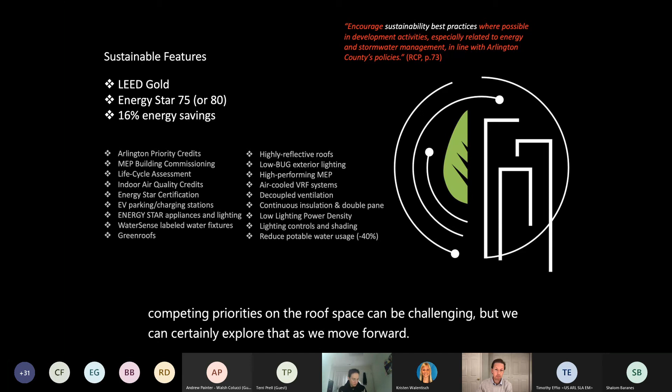All right then. Any other comments before we go to public comment? Do we have anyone for public comment?

Yeah, I had one comment. Oh, great, I'm sorry, Mr. Berne. Olivia, do you put up the 2-minute timer now, could you please? Yes, I'll go ahead and do that. And no other public comments? Mr. Berne, your 2 minutes start as soon as Olivia says so.

Okay, this is about landscaping. I realize you're having three different levels of landscaping, at the street level on Lee Highway, the 7th floor, and the roof. I would like to make sure the final landscaping plan includes pollinator plants. The important thing is don't put any grasses there, no Liriope. These should be exclusively pollinator plants. You can put them beneath the trees, and certainly on the ground level near Lee Highway. They should also include milkweed for the monarch butterflies. There's one particular species monarchs prefer, Asclepias syriaca, A. syriaca. So please put these pollinator plants on every level, wherever you can squeeze them in, under the trees, etc.

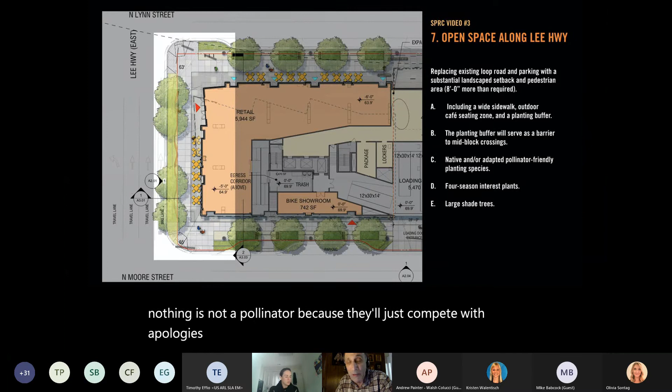It would be nice to see the landscape plan. You probably won't be able to deliver it by the next site plan meeting, but just take it in mind. No grasses, nothing that's not a pollinator, because they'll just compete with the pollinator plants. And milkweed is very important. The county has a monarch pledge, which encourages the planting of milkweed. So this should be an important element. It's not in the general biophilia guidelines, but in a separate action the county board passed a monarch pledge 3 years ago. So that's basically what I have to say. Just put pollinator plants, don't put grasses, don't put Liriope, put ground cover there instead.

Thank you very much, Mr. Berne. I understand there are 2 additional public commenters. Allie Henry from the Rosslyn BID.

Hi everybody, Allie Henry from the Rosslyn BID. I just wanted to jump on to let you know we're here listening tonight. There's been a lot of great conversation, so thank you all for the thoughtful comments and feedback. It's really exciting to see this project kicking off, and I want to thank county staff as well as the JBG team for being so proactive, gathering community feedback early in the process and already starting to incorporate that into this design. We're really excited to participate and continue listening to everyone's great suggestions and feedback. Thank you all for being here this evening.

Thank you very much. Are you yielding back your time? It sounds like yes. Okay. I am, thank you. Thank you.